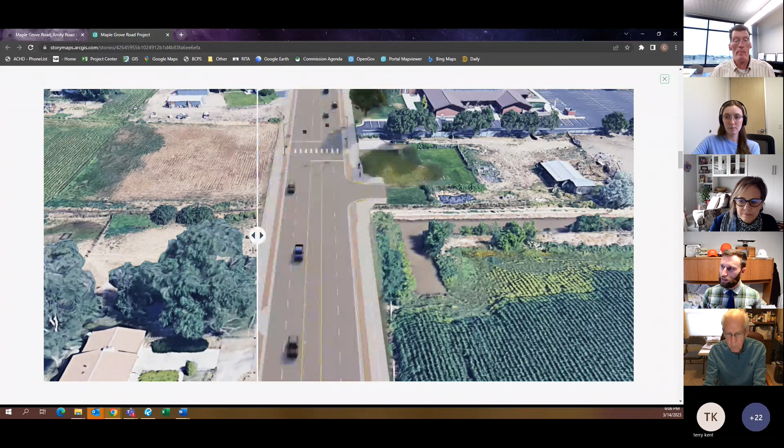The 5-lane road includes 2 lanes in each direction with a center turn lane, and then 10-foot wide multi-use 2-way pathways on both sides of Maple Grove. These have generally a 4-foot buffer, which will likely be stamped concrete that then widens out a little bit at the intersections.

We also plan to add a U-turn at the Victory Road intersection, and then the roundabout at the south end can be used for U-turns also.

One of the changes we'll talk about is this pedestrian hybrid beacon, a type of pedestrian signal. When drivers approach it and it's activated, it'll flash, going from yellow to red like a standard traffic signal. When it's dual red, everyone has to stop and stay stopped, giving time for pedestrians to enter and possibly even cross the entire crosswalk. But what's efficient about these is once enough time is given, the red lights will flash back and forth, so then it's like a stop sign. If the crosswalk is clear, you can keep moving forward.

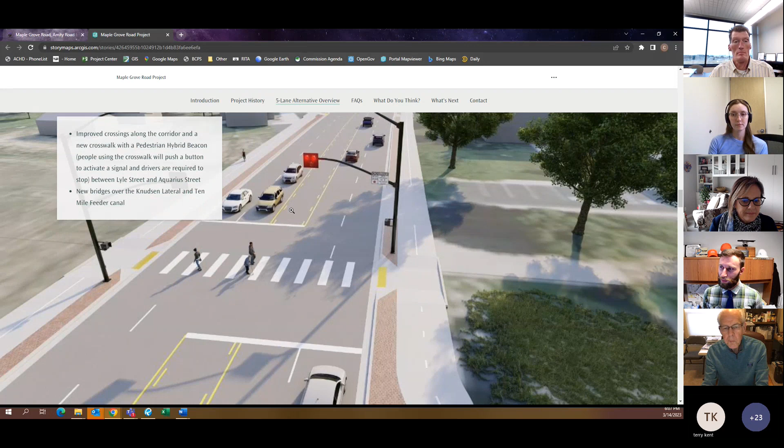This project also includes new bridges at the Knudsen and 10 Mile feeder canals. And this PHB I'm showing is between Lyle and Aquarius Street.

I'll scroll a little bit up here. You can see the PHB. We decided to change from 2 PHBs on this project to just 1 - PHB being pedestrian hybrid beacon. That's because this development near the center of the project plans to have a pathway that connects into the school grounds to the east. So we figured this was the best place for kids trying to get to school to cross, and a more efficient use of the PHB.

And then if we get to the south end of the project, the roundabout at Amity. A roundabout improves pedestrian safety by having shorter crossings, so you're crossing 1 lane at a time and you only have to look one direction. Crossing here, you look left; crossing here, you look right, instead of worrying about traffic in both directions.

We'll also add rectangular rapid flashing beacons, which we call RRFBs. Basically, you walk up, press the button, and you'll have yellow flashers on both sides of each crossing. That makes you more visible both to cars entering and when you're leaving as you cross through the roundabout.

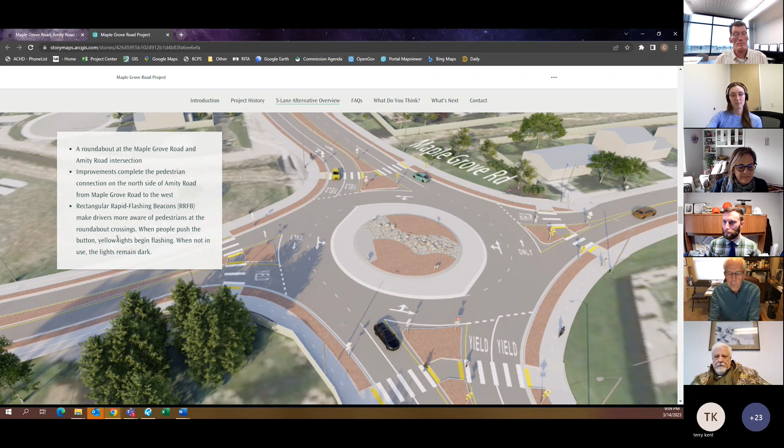For more of a detailed look, we have these 2 exhibits, the widening exhibit and the roundabout exhibit. These just give a view of the whole project area so you can see it all at once.

Some changes since the first public involvement session in March. We did shift the center line of the road about 12.5 feet just on the south half of the project, basically between the 2 churches. That's the maximum, so it tapers out to a point in the Boise City parcel and tapers back in. We basically wanted to utilize that open area that exists and have a little bit less impact on the houses on the west side.

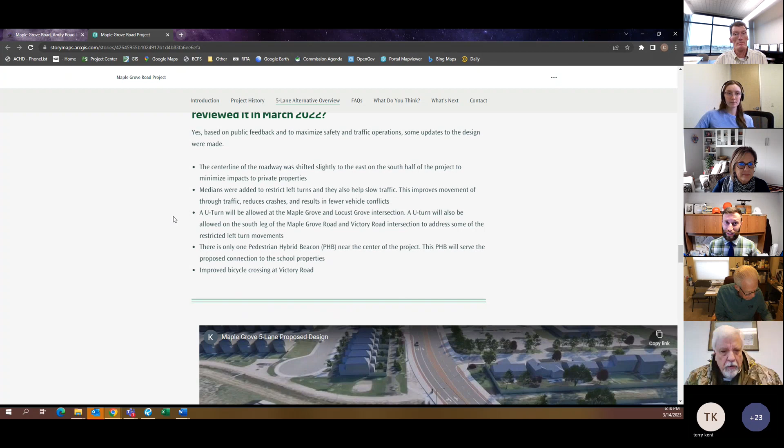We did look at doing more centerline shifts on the north half, but really we believe it's fairest to keep the center line the same as it is now, down the center, on the north half of the project.

We also added some medians to restrict left turns. This helps slow down traffic, calm drivers, makes the road seem a little bit more narrow, and also reduces conflicts - fewer times that a car can hit another car or a car can hit a bike. Again, the U-turn at Victory and then the U-turn through the roundabout make up for these lost left turns.

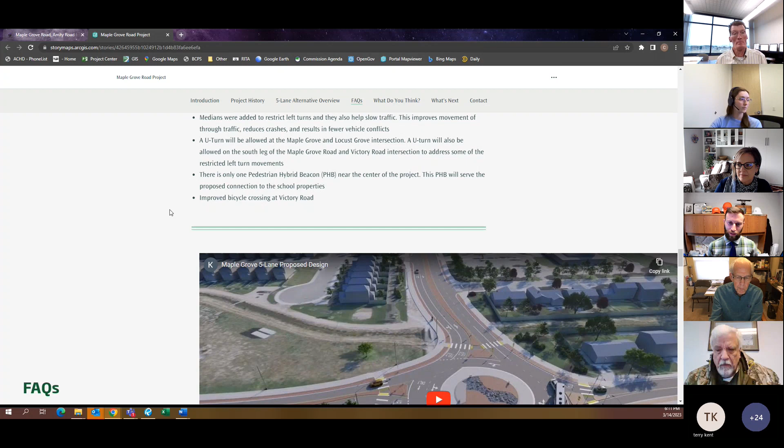I talked about the change in the PHB locations, and we also improved the bicycle crossings at Victory Road. Currently there's a bike lane that carries through the intersection, having to cross the right turn lane and then go through. Instead, we plan to have the bike lane enter a pathway on the northeast corner - you would enter the pathway and then cross in the crosswalk. Same thing on the east side of the intersection. We expect bikes to cross in the crosswalk instead of having to ride through with traffic.

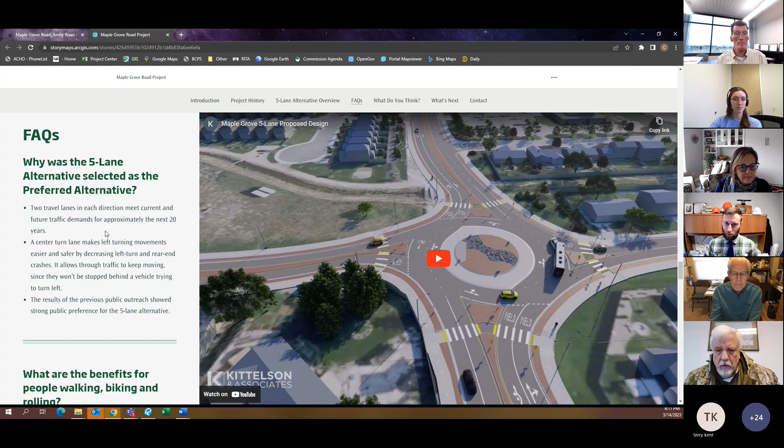Some frequently asked questions. Why was the 5-lane selected? Basically, we need 2 lanes in each direction for traveling vehicles to accommodate traffic demand for the next 20 years.

Then the center turn lane, where we're not adding medians, adds safety for left turners by getting them out of the way of traffic. So if you're turning off of Maple Grove, you're out of the way of traffic. And if you're turning onto Maple Grove, you can do that in two phases, so you don't have to look at traffic going each direction. You can enter the center turn lane and then merge onto traffic after that. This was the preferred alternative from public comment.

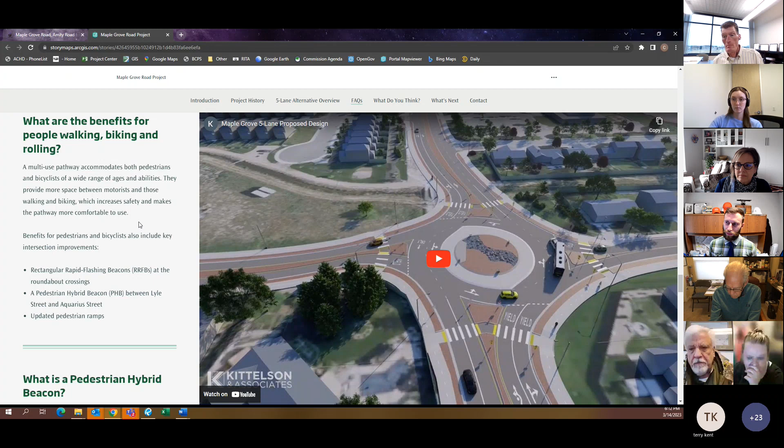Benefits for walking, biking, and rolling. The pathways - we are now striving for what we call the 8 to 80, 8 years old to 80 years old, making people comfortable to walk and bike along roadways. We believe pathways are the best way to accommodate that. If you're a competent cyclist, you're still legally allowed to ride in the roadway, but we feel like the pathways make most people feel safe. Then we talked about the RRFBs at the roundabout and the pedestrian hybrid beacon near the center of the project.

Cody, let's take a pause because we have a question about the operation you were talking about. So the question is, when traveling north on Maple Grove and approaching Victory, there is no left turn option. So traveling north on Maple Grove and approaching Victory Road, can you turn left onto Victory Road? I'm guessing they're talking about Bennett Street.

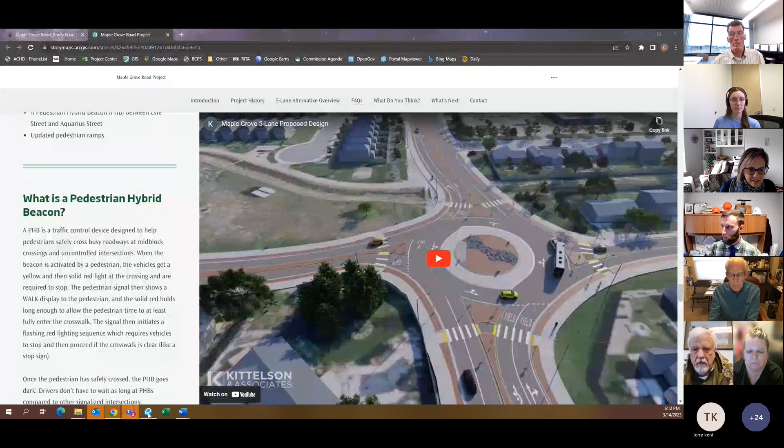At Victory, like I said, we plan to add a second left turn lane, which includes a U-turn. But because of extending these left turn lanes, we feel there'd be way too much conflict at the Bennett Drive intersection. So instead of being able to turn left onto Bennett, you would use the U-turn. And instead of turning left off of Bennett onto Maple Grove - sorry, Burnett, not Bennett - you'd travel east to Mitchell, or the street next to that, and then turn right onto Victory. Then you can come through the Victory intersection and turn left, or keep going east if that was your preferred way. This is basically a major safety improvement.

As you can guess, if we open this up and pull the median back, you wouldn't know if someone was turning left onto Burnett or just merging into these left lanes, which could cause rear end crashes. As well as visibility looking down the hill to Victory Road as vehicles come up the hill and being able to see them as you turn left.

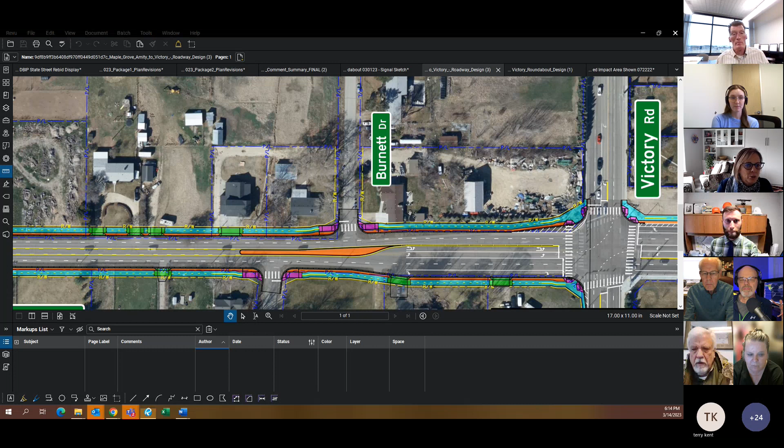Thanks, Cody. I think that graphic helped a little bit with that explanation. Perfect, yeah. So we talked about PHBs.

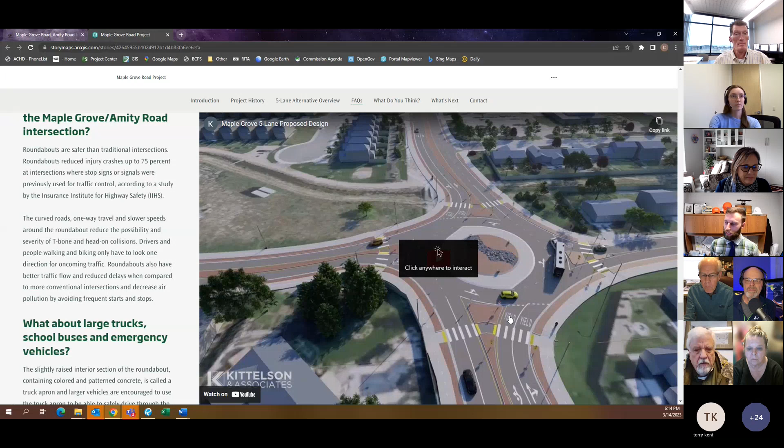Why we chose the roundabout - basically, roundabouts are much more efficient and safer than signalized intersections. As you can see here, they can reduce crashes up to 75%. And when there are crashes, they're usually low severity, since they're usually sideswipe crashes instead of head-ons or T-bones, and usually happen at a much slower speed. At a roundabout, the geometric design forces you to slow down to 30, 25 miles an hour as you enter, whereas at a signal, you can carry through if you hit the green light at the speed limit.

And then for large vehicles, semis, fifth wheels, this gray area here is the truck apron. That allows large vehicles to overtrack and still get around the roundabout, while deterring small vehicles from going too fast through it. Especially for semis, they're trained to take up the center, both lanes, just to make sure no one enters on either side of them. That way they have space to use the truck apron without impeding other traffic. So if you do see a semi doing that, that's on purpose.

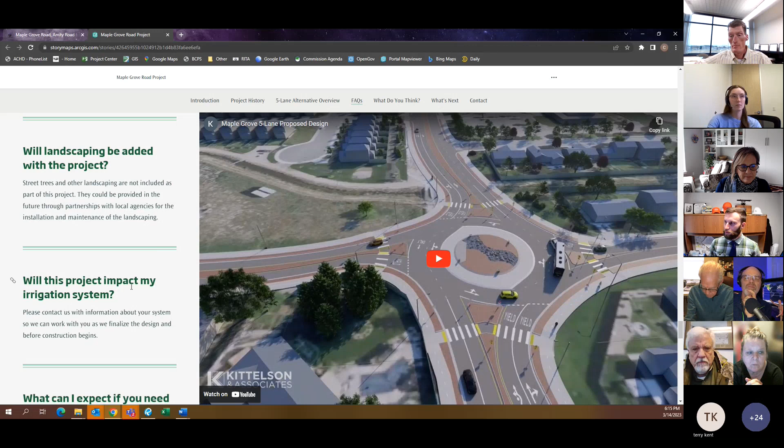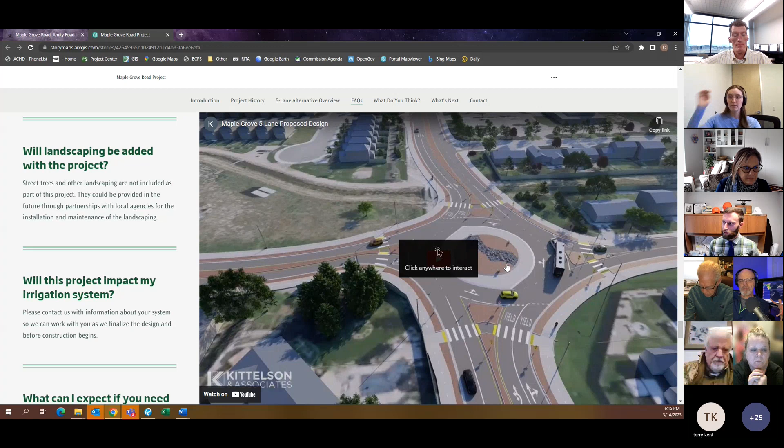Currently, we don't have any landscape plans for the project. We do a kind of hardscape in the center island of the roundabout, and we're still looking at options there. There is a stormwater basin planned here and up the road, and those will be vegetated, so those will be landscaped. But as far as the buffer and the center island, those currently don't plan to be landscaped. In the future, the county, city, or even neighborhoods could request to do some landscaping in the center island.

And the project may impact your irrigation system. Please reach out to us if you think that it might. We've already met with quite a few property owners along the project, and we just like to know for sure how it works and how you use it so that we can try to replicate it.

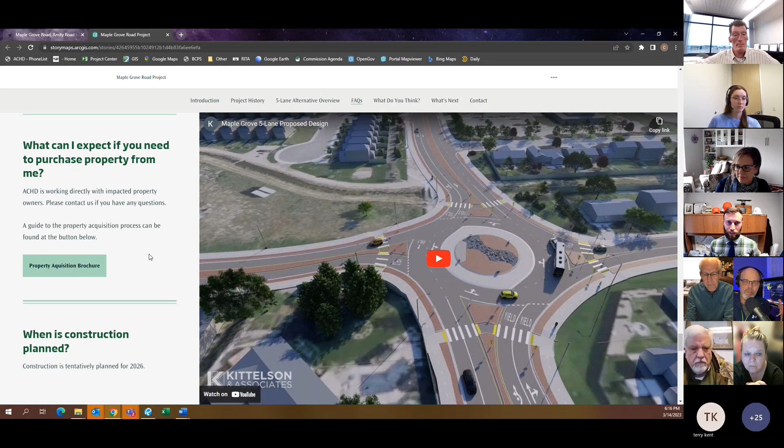And if we need to purchase property from you, there's lots of good information in this acquisition brochure. Again, I would recommend you just reach out to me directly so we can talk one-on-one and get into the details about the property.

And if you looked on our 5-year work plan, which is getting updated this summer, we had the roundabout to be built next year, 2024, and then the widening was just in the future. So our new plan is to build both of those together in 2026.

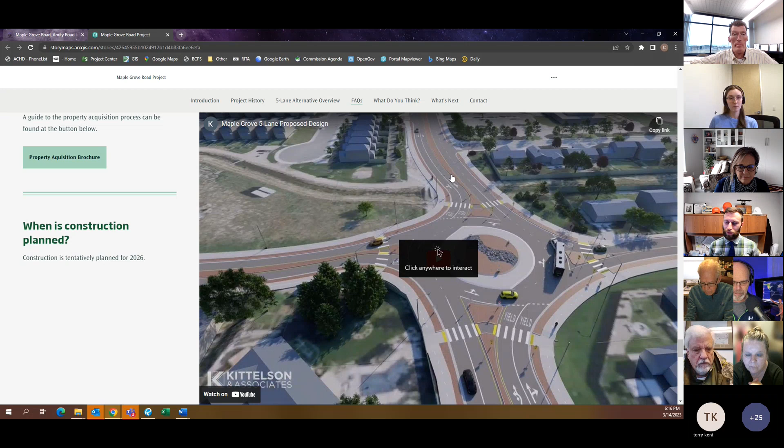And below that is a link to the survey, and below that is a timeline. Again, future, but 2026 is the most likely date there. 2023 is when we want to go through the right-of-way process into 2024. And if you need it, my contact info is at the bottom.

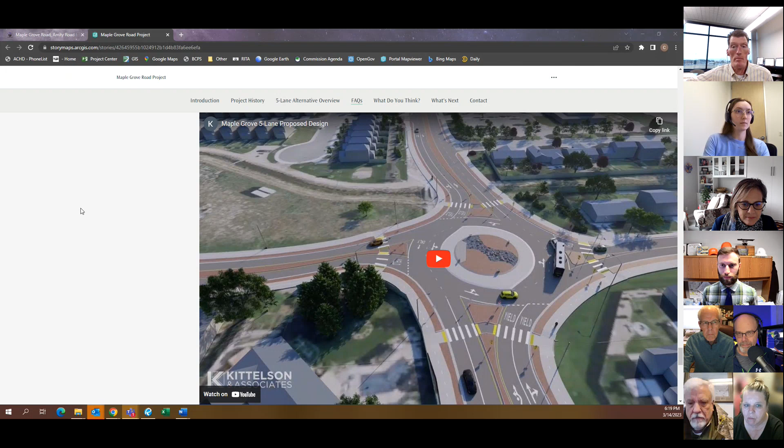So you should be able to go ahead and unmute yourself. Can you hear me now? Yes. Yeah, so I live fairly close to the intersection of Amity and Maple Grove. How far is that divider? Is there a divider that keeps you from turning left or right? And how far does that go from the roundabout, or is there one?

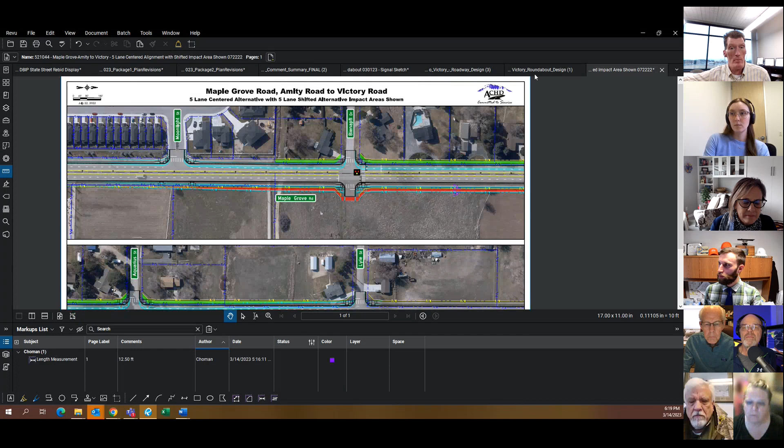So we plan to extend the center median about to Moonlight. So they will be allowed, so it's kind of split between these two. And that's the north side, and the south side, it's pretty short. It doesn't extend to Cree. But with the extension up to Moonlight, this is proposed to allow left turns into Moonlight. So instead of being able to turn left into Tillamook, you would turn up into Moonlight and you come back to Tillamook. And then if you want to go northbound, both would have to turn right and then use the roundabout to make a U-turn.

So Cody, my concern is me coming out of my property, I've got to turn right all the time. I can't go anywhere but head to town. And which street do you turn off of? I'm right next to the church, my driveway's right next to the church. Oh, gotcha, of course, I can't turn left. So I've got to go right all the way down to the roundabout or whatever. So how do I get back to where, if I want to go left to take my kids to Amity?

Okay, yeah, if you wanted to get to Amity, theoretically you'd use this turn here, get on Moonlight, and go back the other way. That's probably not preferred, you'd have to go through a subdivision. Do they know that these subdivisions are going to have traffic in the middle of them? To be honest, we did realize this pretty recently, and I was going to ask if we would look at adding a Michigan left here, so this would be not just a left turn, but also a U-turn.

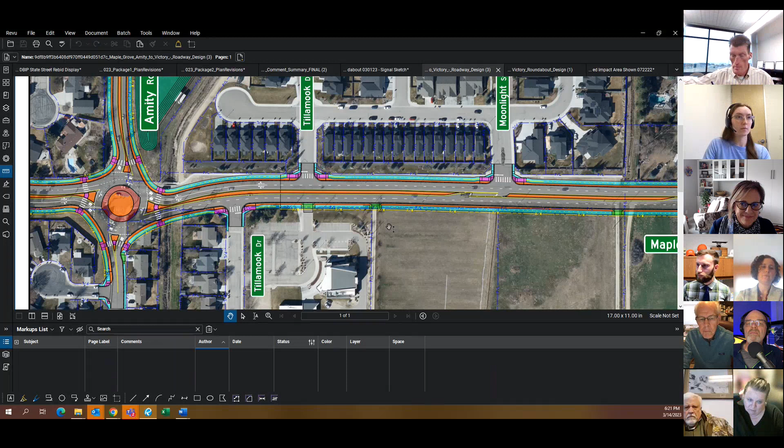Yeah, because we go shopping at Albertsons out on Lake Hazel, I can't get there without going through this subdivision. And I can tell you, because of the pipe being put in the water line right now, that subdivision is, everybody in the world's going through that subdivision. They're up in arms. I can tell you that right now. Yeah. Great. Thank you for sharing that perspective. That's important information for the team to know.

All right, Anthony? Yeah, so you guys said that you shifted the horizontal alignment on the south section, but on the north section, what's the offset from center line to the new right of way, and what was the offset from center line to existing right? Because it's 48 foot right of way right now, so 24. What's the horizontal alignment look like on the north section?

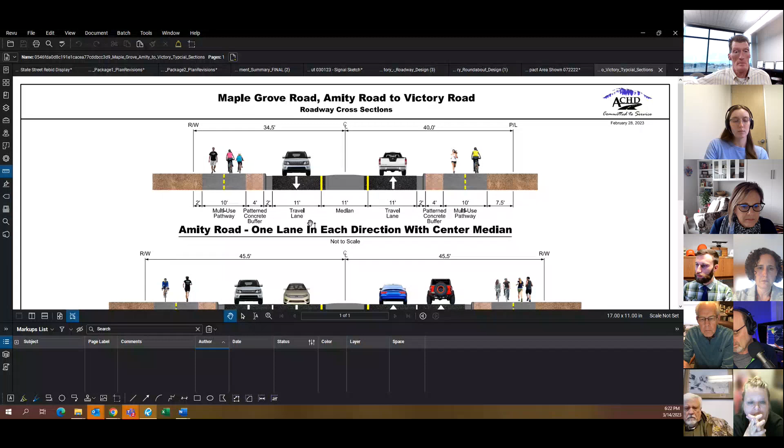So on the project website, we do have the typical sections for each one. So with the 5-lane, where it's, like I said, the north half is pretty much centered on the existing center line. So it's said 45.5 feet. Well, I mean, pretty much.

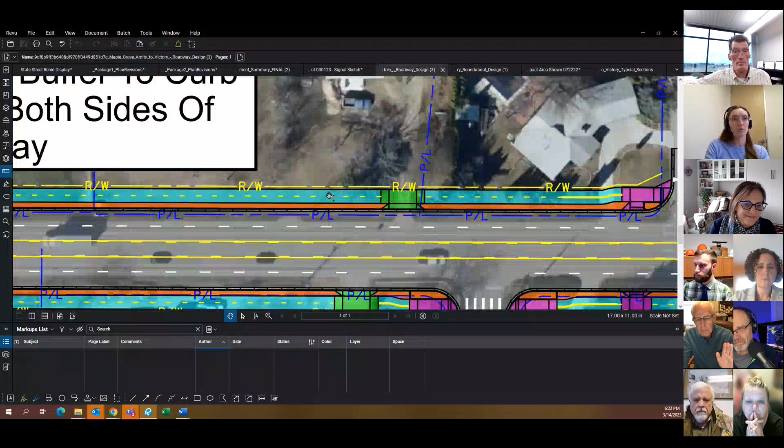Is it exactly on center? I mean, could I go out to my fence and measure an additional, like, whatever, 24 minus 48, 45.5? Can I just go measure that from my fence? Or is there some shift?

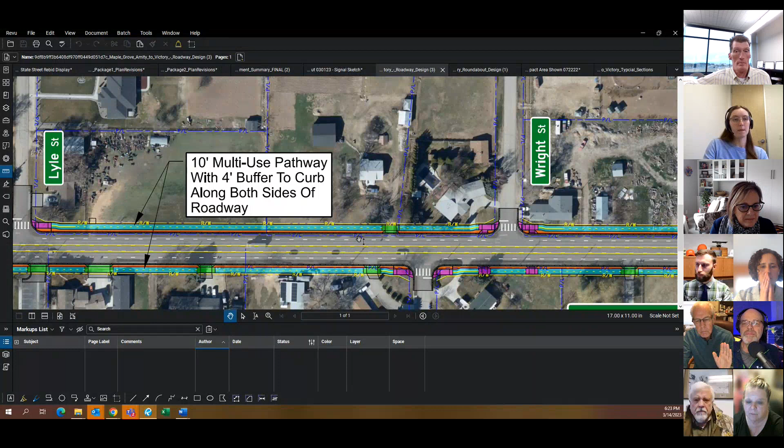Did you, because the street widening from Victory to Overland, you guys jogged that all over the place to try to avoid properties, so if it's on center line, evenly offset between the left and the right, then I should just be able to go and measure it from the current fence line or property corner. So is it constant on the north section, other than at the intersections and down by the south end where you shifted it for the roundabout?

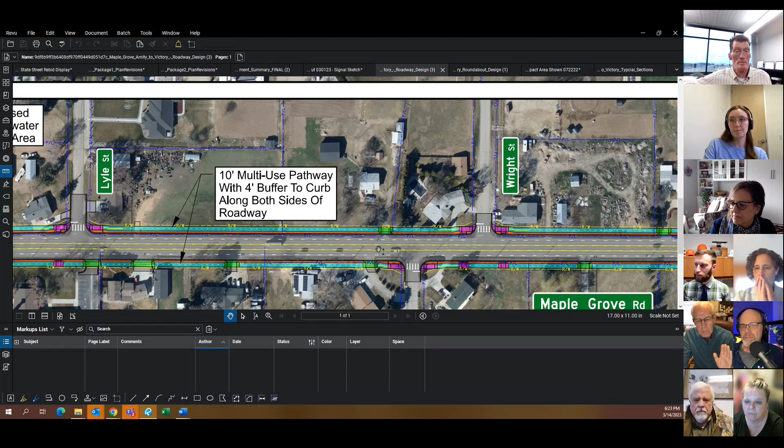I'd say effectively, yes. We need a little bit extra right of way at the side streets to get the extra room for the ped ramps to cross, and to get the offset for the pathway crosswalk. But yeah, as I zoom in here, you can see existing center line is pretty well centered on the center turn lane. Okay.

All right. We'll come back to you, Anthony, if you have some follow-up questions on that, but let's keep moving forward. Jill, you have your hand up?

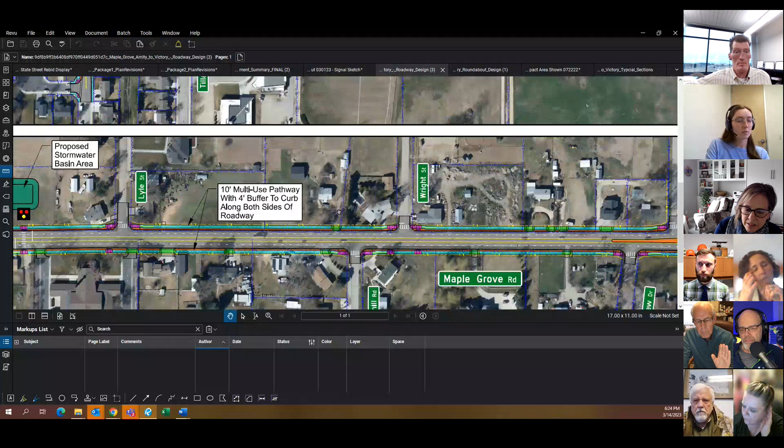Yes, my question is, if this project starts in 2026, when is the Amity to Lake Hazel section scheduled? That's hard to say. It was scheduled for future in the current five-year work plan. We'll know much more in July when the draft five-year work plan gets put out for public comment. But as of now, it doesn't have a construction year.

Okay, that's good to know. And then when you say 2026, is that like start of construction or end of construction? The goal would be to bid the project out in the fall of 2025, so that way we could start as close as possible to January 5th or so in 2026, and then complete the project by that fall is the current goal. Okay, that sounds good. Thank you.

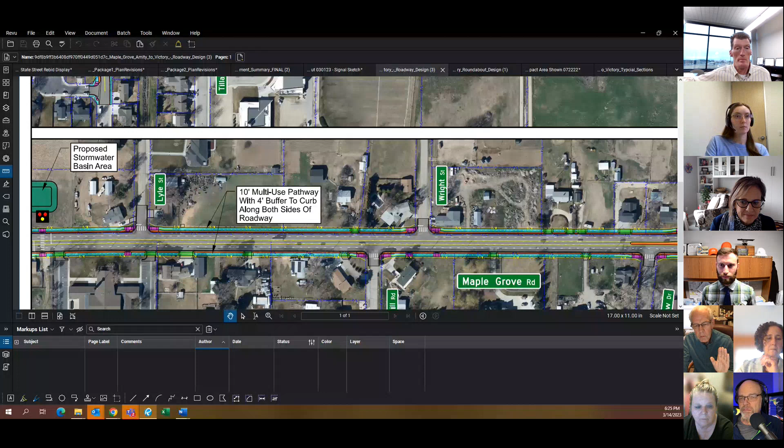Thank you, Jill. Emily? So I'm just curious, like, what made you guys want to start this project? Were there any specific problems that this is looking to solve?

In general, it's to accommodate future projected growth. This project's been on what we call the capital improvements plan. It's a 20-year plan, you can browse through that, it's on our website. And for the most part, Maple Grove, 5 Mile, Eagle, all of our roads are planned to be widened to 5 lanes. That's the main drive for most of these projects is future growth.

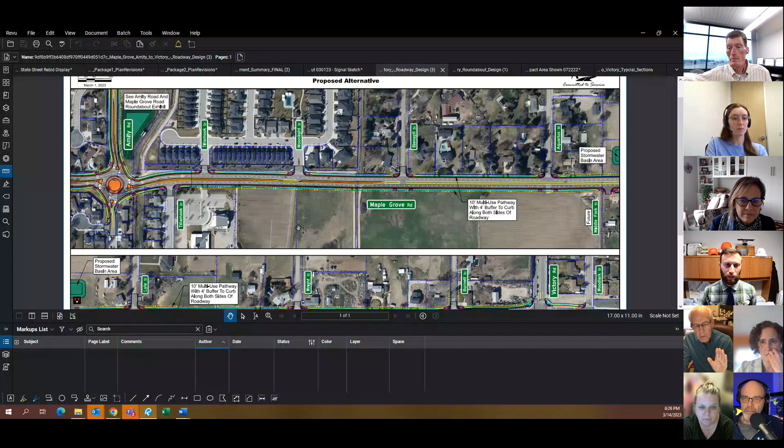Great, thank you. Dawn, do you have your hand up? Yes, can you hear me? We can. Okay, I've made many business trips into Michigan where the Michigan left is used.

And it's an excellent way to do the kind of turn that you have need of here, so you do not have to go through somebody's area. So I think that should be the way to incorporate that. That is, if you have traffic through those people's houses, they're going to be upset.

My other addition to that was that in Michigan, when the traffic got so busy that the Michigan left people had trouble turning, they would actually put up a red light there to halt traffic so that the string of left turners could get through. So that's how you do the growth on that.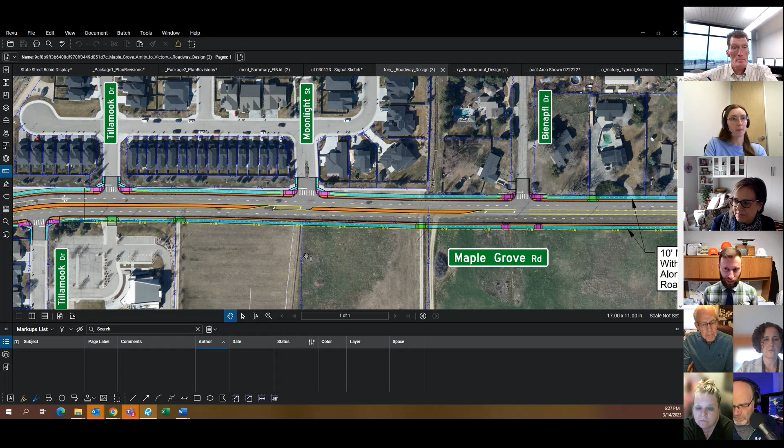Yeah, we've noticed that Idaho Transportation Department recently installed one of those on Eagle Road, just north of Fairview, where they actually closed down a Michigan left because they were crossing so many lanes of traffic.

And then to make that safer, they added a signal there. And as you said that, I realized, instead of at Moonlight, maybe Bienapfl is a better location, or just another place we have room. Yeah, great point.

Thank you. Yeah, and realize that when you get your center lane for collecting the cars for the left, you may need to move that a little bit further north and lining it up right with that Moonlight Street. But anyhow, that's my comments. Thank you.

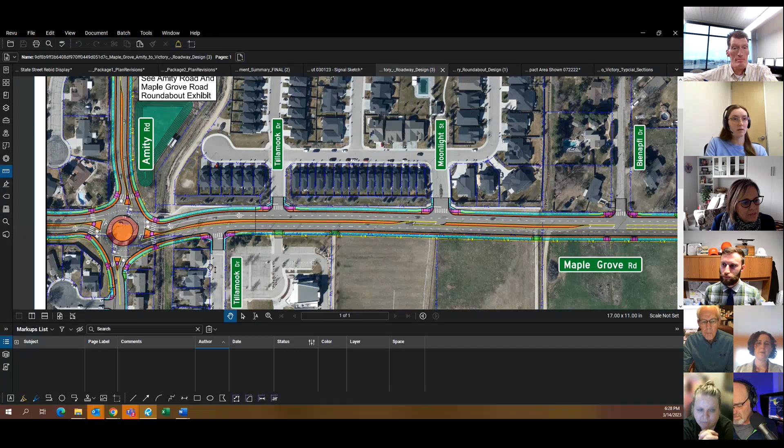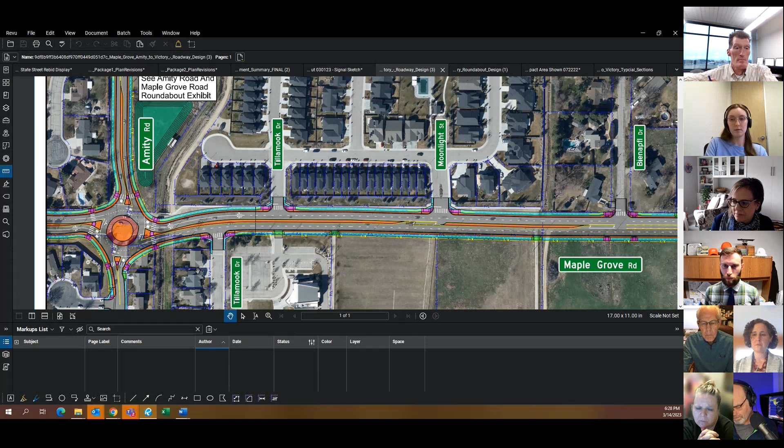We can, thank you. I'm surprised actually that you chose the intersection of Amity and Maple Grove to put in the roundabout, because there is no access from Amity over to Cole Road. So there's only 3 places where people can join that roundabout to get through. I'm wondering why you chose to put it there.

So roundabouts have specific uses, and there's thresholds for where they work best. Just how traffic flows through here with a heavy majority of traffic being on Maple Grove, it allows that traffic to keep moving without needing to completely stop for traffic on Amity. But it also forces people to slow down enough that people on Amity can also use the intersection. And it helps to calm traffic by also slowing people down.

So it's one of those locations where roundabouts can be used really effectively when all 4 legs have lots of traffic, when it's more even, or when you have lots of traffic on one movement. So this lets traffic continue to flow on Maple Grove while still giving access to Amity.

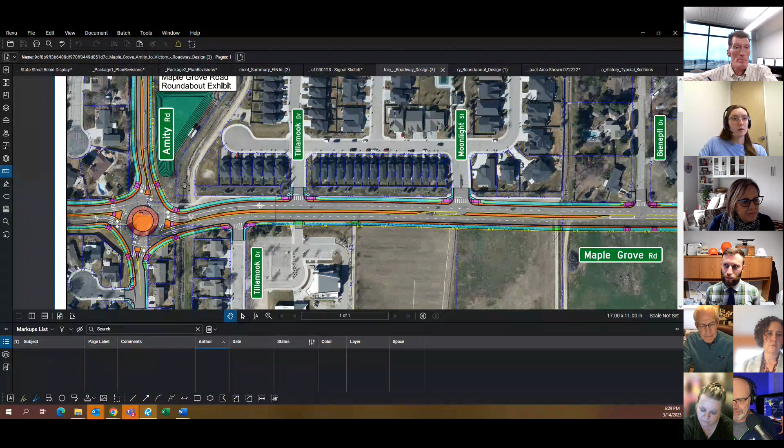A good example where that's the case, roundabouts just like this one, multi-lane, we've installed: there's the one at Eagle Road and Zaldia, which was mid-mile between Amity and Victory. Also the Whitewater Park Boulevard roundabout is another example of a multi-lane roundabout. That's basically a 3-leg intersection with the entrance to the park, and that's why we chose the roundabout, to keep traffic flowing on Whitewater instead of having to stop it every time someone wants to enter or leave the park or the small side street.

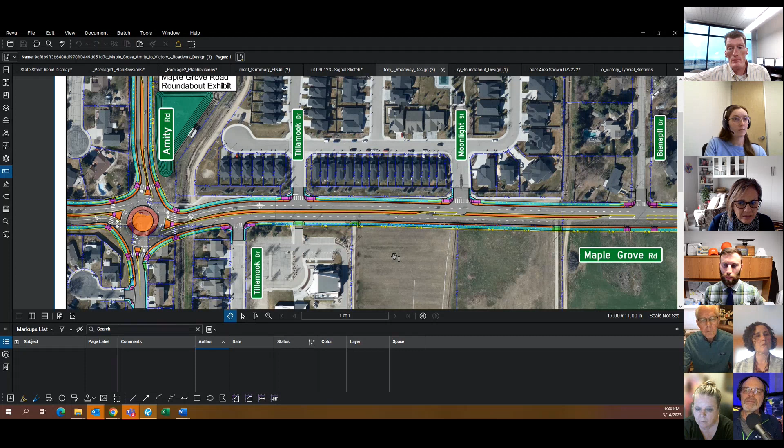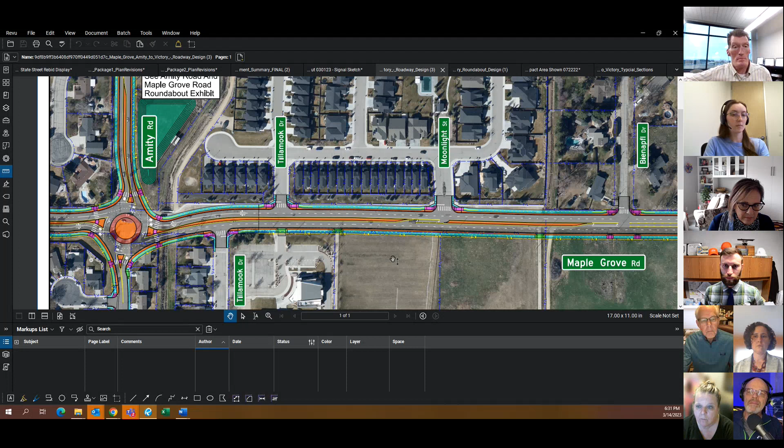Are you talking about restricting left turns or the roundabout, or just everything in general? Restricting left turns and the roundabout, I guess from my perspective, it seems a little excessive. And then my second question would be, I don't know if it was mentioned earlier, but planned improvement between the park and potentially that new subdivision that's going in right now, and if it's not a park and it's a bunch of houses, how that will affect this as well.

Sure. I mean, the road's not widened yet. There's no center turn lane now, so it's hard to kind of track crashes for this location. In general, ACHD is looking more into restricting left turns just because of the safety improvement of fewer possible conflict points.

Within reason, usually no left turns means you have to drive further out of your way. That happens along Eagle Road, where it's a highway where you can't turn left for long portions, and you can make either a Michigan left, turning at the center mile, or at the intersections.

And also these medians slow traffic, and that's been proven to make the road appear narrower, and it helps calm drivers. You get less of a wide open feeling, so it'll reduce the comfortable speed. And again, it's just a reasonable safety improvement, we feel.

We'd rather not wait for crashes to happen and fix them, and try to make the project as safe as possible. Same with the roundabout: not only is it more effective with moving traffic, but also the safety improvements there have been pretty well proven.

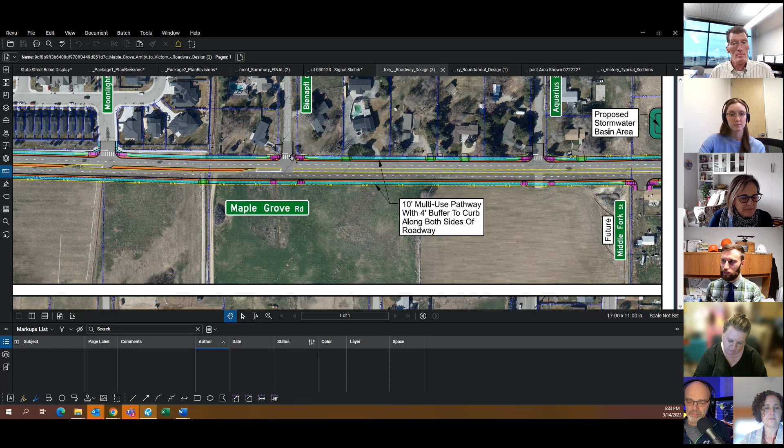So to go to that first, when this area develops, we've kind of left that open. Another reason we moved the pedestrian hybrid beacon from Bienapfl is we're not sure if this development will take access off Aquarius or off of Bienapfl. Most likely Bienapfl, and then we would likely have a traffic signal there, depending on what the development actually is.

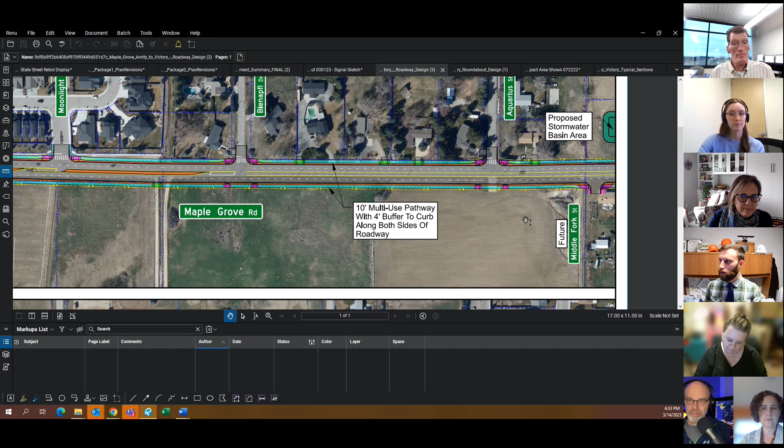And then, sorry, it's been a long day, I have to remember the other part. Will you remind me what you just said about the final point? The white markers—oh, thank you.

For the bike, yeah, we don't plan on that. So that is part of the point of the pathways, is that there would be no bike lane—so no bike lane, no markers. Bikes, if they're comfortable, can ride in the roadway, but most cyclists would use the pathway instead.

Great, thanks. And before we go back to Anthony and some of the other people with their hands up, just a quick explanation, Cody—there was a question about the two bridges. What are those exactly? We know they're over the canals, but could you explain where those are and what they look like?

Yeah, so the first one's the 10-mile feeder, just north of Amity. You can see we have to widen the bridge and shift it to the east. That'll include full pathways on both sides. We'll extend it out so it's clear of traffic, and just improve that—right now there's basically just the pedestrian facility on the west side, nothing on the east side.

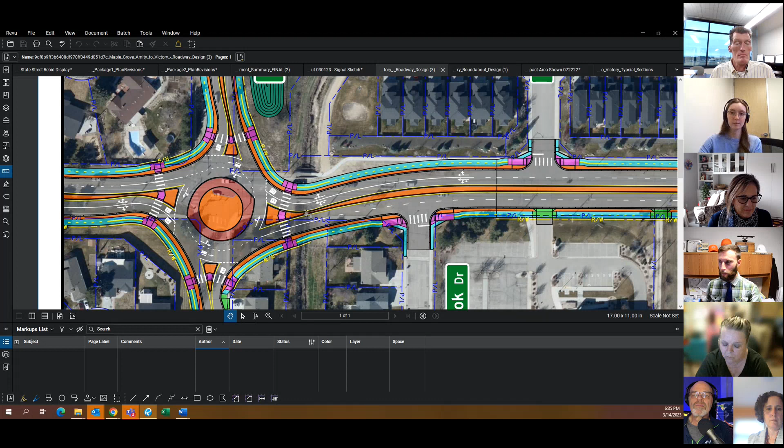And then up here is the Knudsen lateral, and this is a pretty basic improvement. We'll extend the existing bridge, replace it, and extend it again so it's away from traffic and away from the pathway.

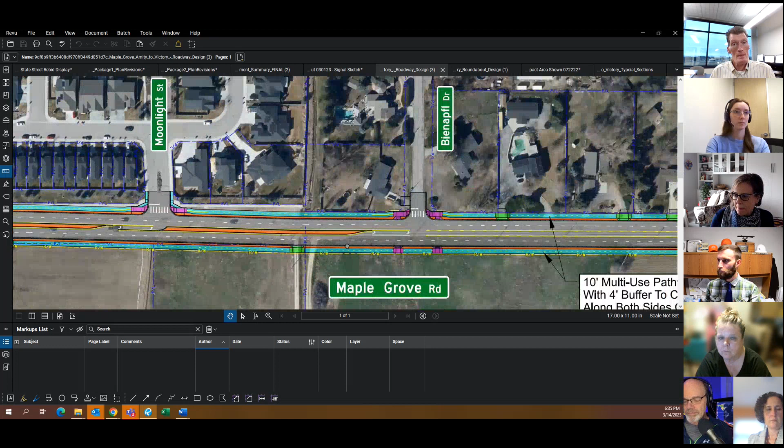Great, thank you. Anthony? Yeah, so I noticed in looking at the colored proposed hatching of improvements that there are a lot of people on this alignment, including myself, that have horseshoe driveways. You've eliminated the driveways for most of them, so now there's only one entrance and exit out of a single driveway. But then there's some, like north of Wright Street, there's a home with a horseshoe driveway where you've kept both driveways, it appears.

I don't know what the rhyme or reason is for why some people maintain two driveways and others get—yeah, that one right there above your cursor—so why some people are getting two driveways to maintain existing access while others are having some of their access removed. I had sent Cody an email and asked, and it's, I guess, to reduce the number of people or points of people turning into the road, but access to our property is pretty important. So why are some people getting or continuing to get two, and others having half of their access eliminated?

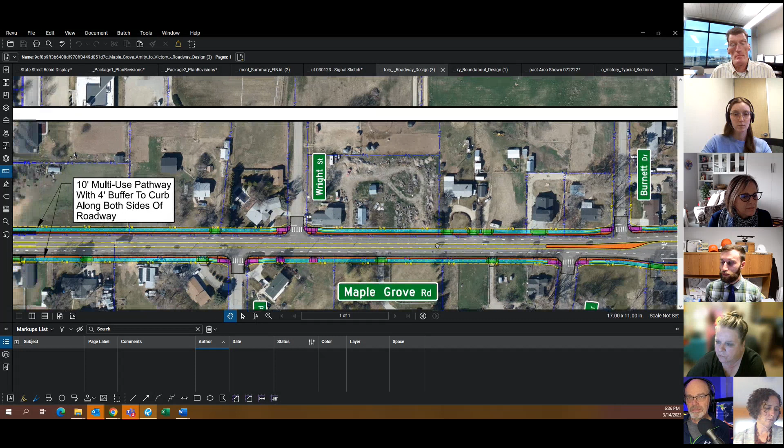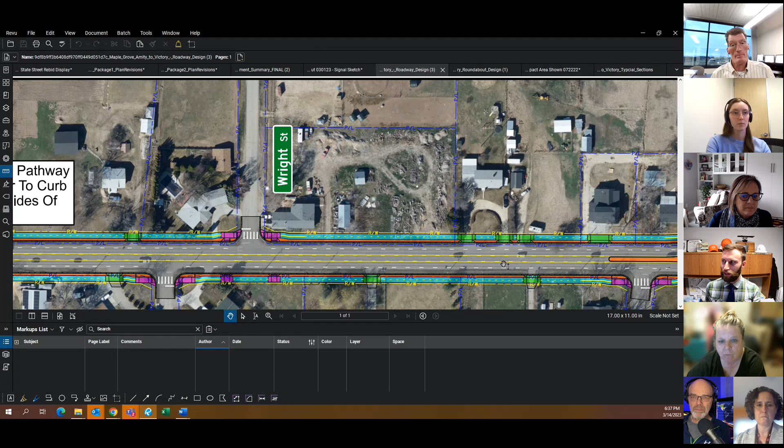Right, to clarify, or just to add on, a goal of this project was to reduce accesses where feasible, and each property is context-sensitive. So the one remaining here, this is an active daycare, and there really wasn't a way to allow cars to enter and back up. Parents come in and use this as a looping entrance and exit. So to safely get kids out of there and not have traffic back up onto Maple Grove, we considered having those two accesses there, and if things change in the future, we can remove those accesses.

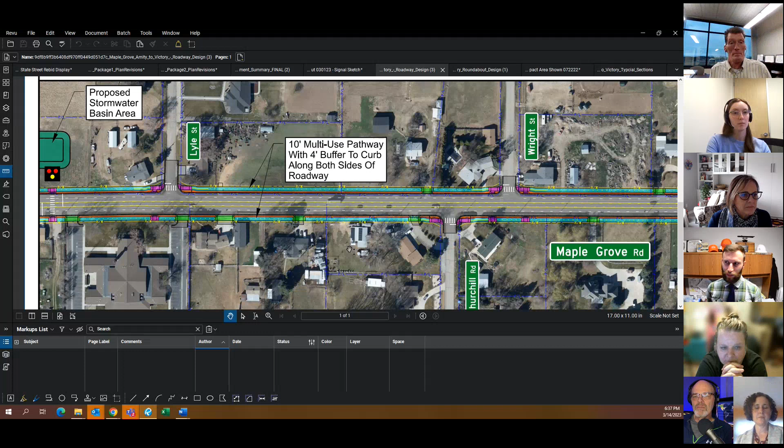Another example, over here on Churchill, to continue using this part of the property, this homeowner needs to be able to enter here and back in or pull through, whereas this property owner just has driveway access here, so we might realign this to make it easier. But all these are just proposals—they can be discussed during right of way. Overall, I wanted to show what ACHD would prefer take place. It doesn't mean it has to, but we do try, especially on these arterial roadways, to limit access as much as feasible.

And again, I do encourage everyone, if you are a property owner along here, to reach out to Cody and discuss your specific questions and circumstances. Leslie.

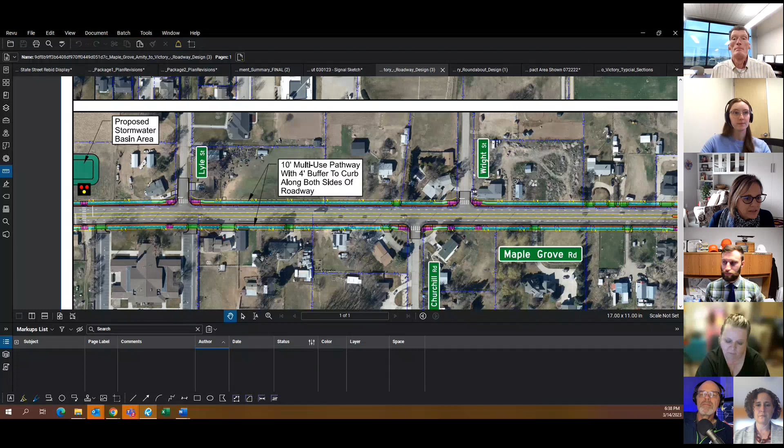Hi, just a couple of things. I get the whole safety issue on not allowing so many left turns. At the same time, I question that we've expanded this road to 5 lanes so we can accommodate more people, and yet it seems like the people along there are having their accommodations taken away by not being able to turn left. So the safety part is one thing, but I think we're smart enough to make left turns. That's why we take driver's license tests.

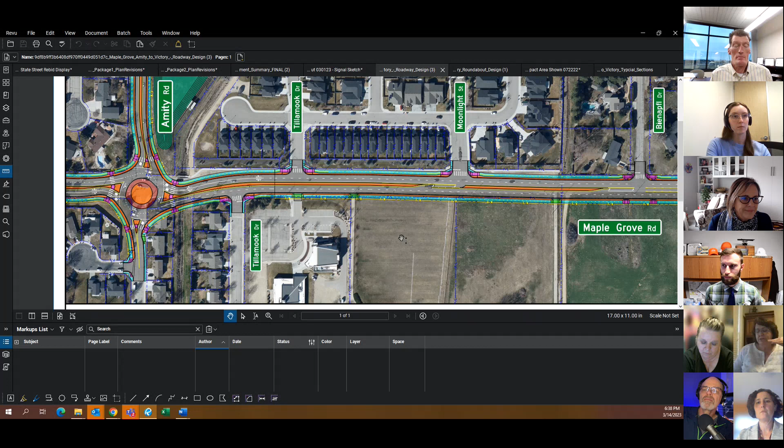I don't think we should have to control that safety. There will be accidents probably no matter which way, and I just feel like there's too many rules and regulations for us to be able to drive like we've been taught to drive. Taking Burnett doesn't affect me, but taking Burnett out to the west and then onto Victory, you're taking them onto a 2-lane road that's already, just with this diversion with the Maple Grove project now, that backup on Mitchell is huge. And to get that traffic onto Victory there, and then to take more people out onto Victory onto a 2-lane road is going to be a huge backup over there.

So we're expanding Maple Grove to 5 lanes. Let's let people use it. Let's let them turn left. Let's let them get on that road. That's why we're doing this.

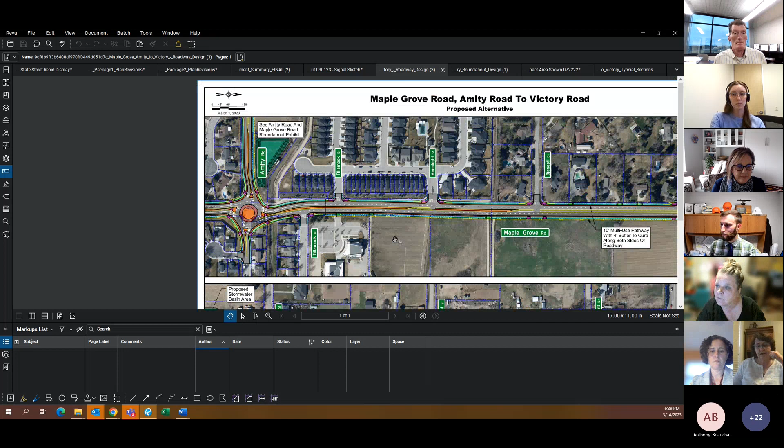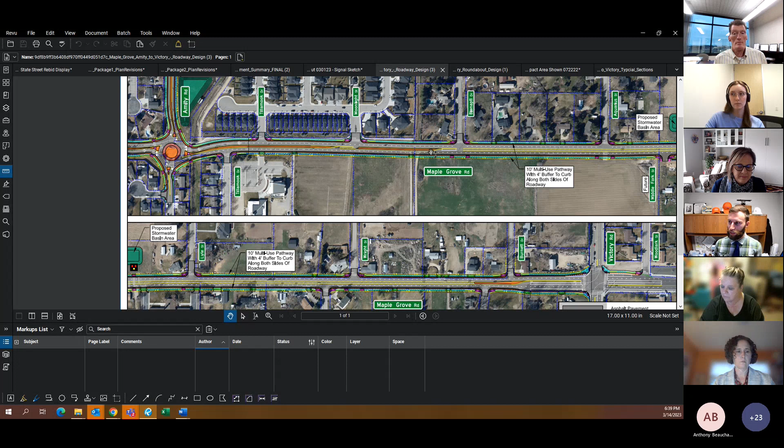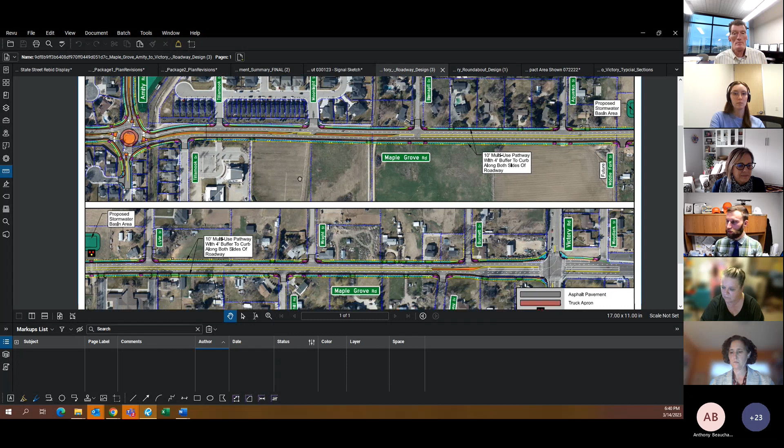Sure, I appreciate those points. Another improvement though with the medians is slowing traffic, trying to keep those speeds down. We honestly did look at adding medians the entire project, which was part of the 4-lane alternative, and realized that that's too far and too much for this project at this point, but it's something that we did think about. Basically we dialed back to these medians on the south end being the feasible ones. Again, not saying that they go through, but more feasible, and we've already gotten some really good comments on those. But this one at Burnett, it's just so close to such a major intersection.

And we anticipate these left turn bays to back up and be full during peak hours. There's going to be a lot of traffic here. So we understand the negatives. And with the detour expanding on those now, hopefully in normal cases, the only people on Burnett are the people who live along there. And there is another side street off Mitchell that you can turn on. I forget the name because I'm not very good at pronouncing it. Let me see if I can pull that up real quick.

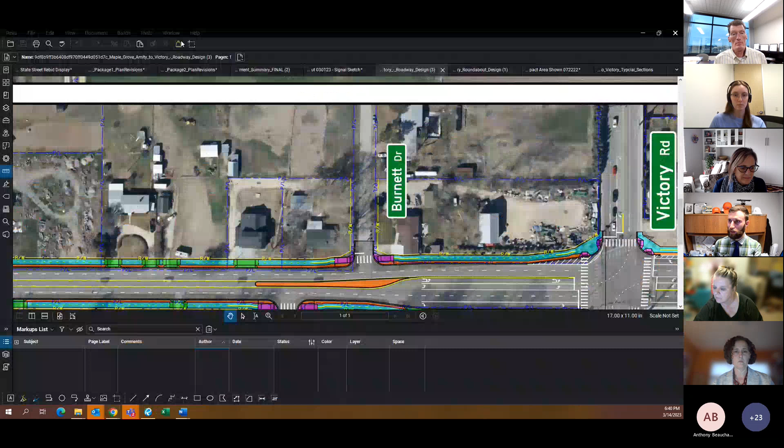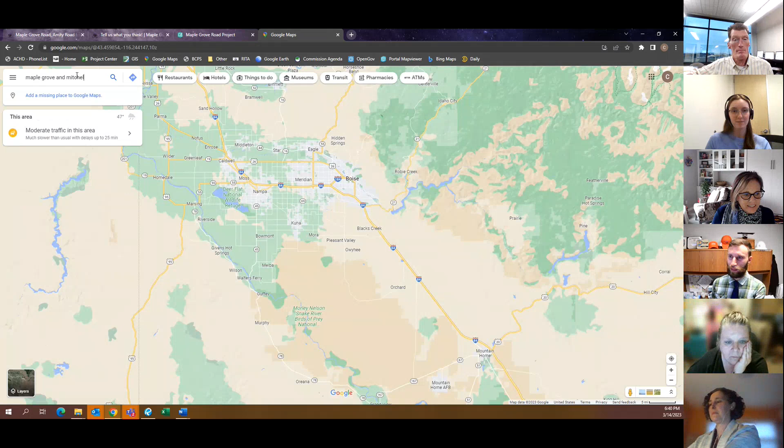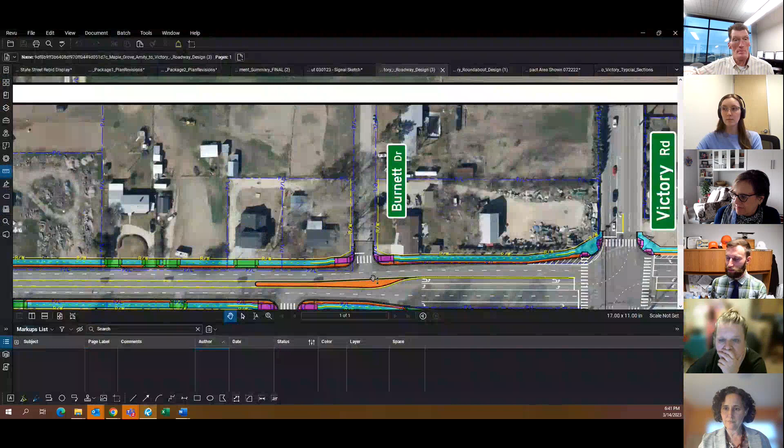It's Quercus you're looking for, I think, Cody. Yeah, that sounds right, thank you. And like I said, it's not - probably misspelling Mitchell. Here we go. Yeah, Quercus Avenue. Again, we realized this one is less - well, it's still about safety and reducing conflict, but this one is even more of just a design requirement of having an intersection so close to a major intersection.

All right, Alan. Yeah, I have a question, questions. Just as a result of the last conversation about traffic as a result of the project, I'm not sure I understand that. Maybe you could explain that again. How will this current line cause traffic that would otherwise not be going down Burnett?

Sorry, Alan, sorry, I'm not done. Yeah, you're breaking up. Your sound is breaking up. So I think your question is still related to the restricted turns and the amount of traffic. Can you hear me now? Yes, can you hear me? Yeah, so I did not understand how the traffic would be increased as a result of the project design. Could you explain that again? Was the question about the purpose of the project with traffic growth?

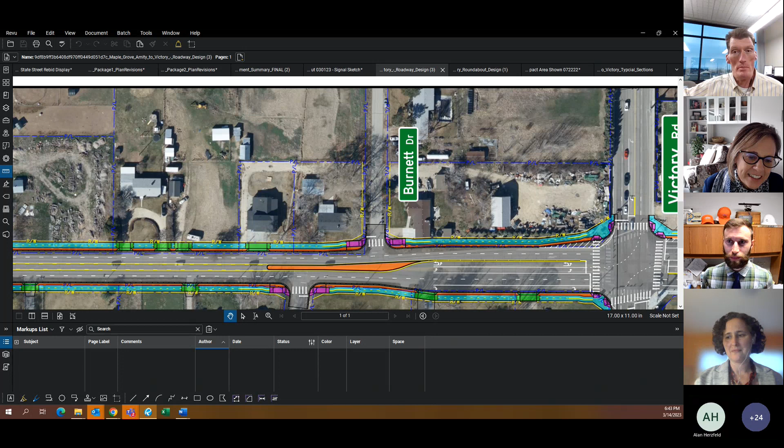Alan, you're still breaking up, can you type it in the chat real quick and we'll follow up? How do I do that? At the top of your screen there's a bubble that says chat, and if you just click on that you should be able to type your question in. You keep breaking up at that critical word, we can't hear you. I'm sorry, I do not see the chat on the top of the screen. Dang it. I don't see a chat option. If he's on a browser, it may be at the bottom, it's a little like a conversation bubble. Maybe, is it on the bottom of your screen?

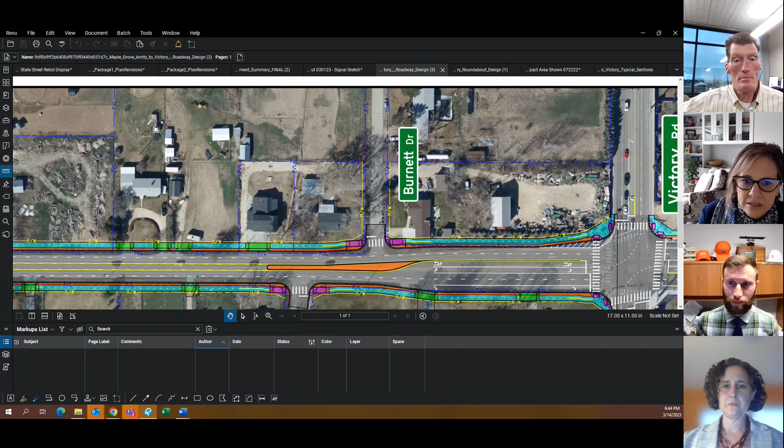I don't see it. I'm sorry. All right, try your question one more time. Be brief. You don't understand.

I don't understand why there's going to be an increase in traffic on Burnett as a result of the project design. Got it - we don't expect there to be.

Basically, people who live on the east end near Maple Grove would use it more often to get to their homes, so it'd be less than a dozen more cars a day, likely when we're not in this detour. Right now there's utility work adding a water line down the middle of the project, from the Knutson lateral up to that new development. So there's a lot of detour traffic coming through Mitchell, and some people turn onto Burnett once they see the closure. But overall, it shouldn't increase traffic on Burnett.

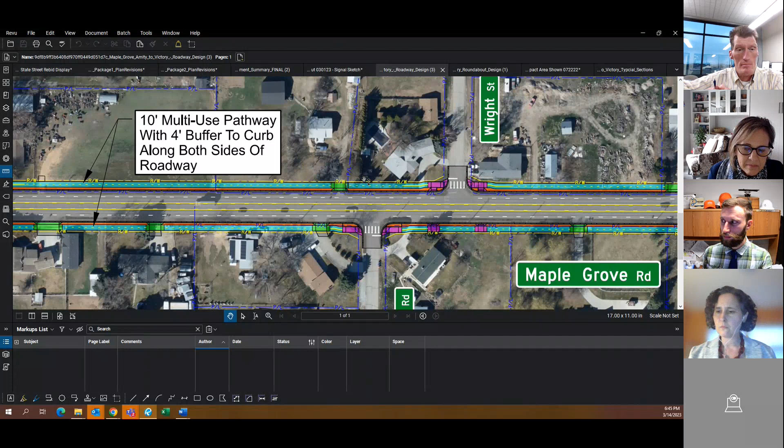The other question I had was whether there's an irrigation pipe that goes under the grove now, basically where Churchill is. It goes from the east side there, just south of Churchill, across Maple Grove, and then enters a large steel weir that feeds water to Wright Street rotation and to Burnett Street rotation. It's very close to the east side of Maple Grove right now. I'm wondering if you're going to be excavating and replacing the current irrigation pipe under Maple Grove, and whether the weir will be affected by the project.

In general, it's likely we are, and we will work with the ditch rider or the irrigation district to make sure that what we replace matches or is better.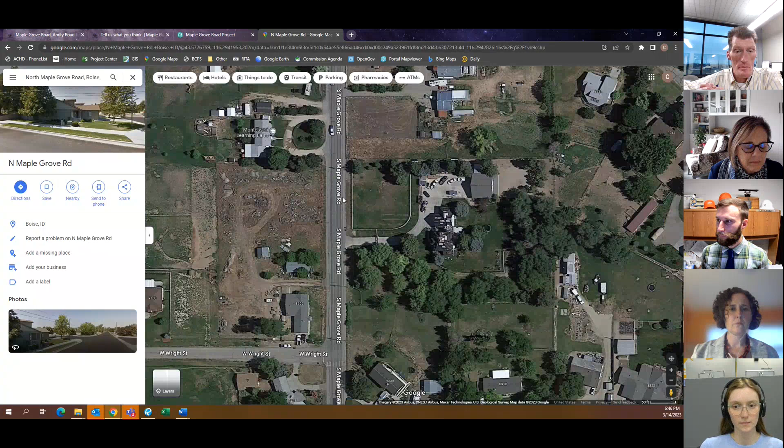I actually have your old plans - I can show you where that weir is and where the line goes from the 96 sewer line improvements. It should be in our survey, but in general, anything that we impact, we will replace in kind.

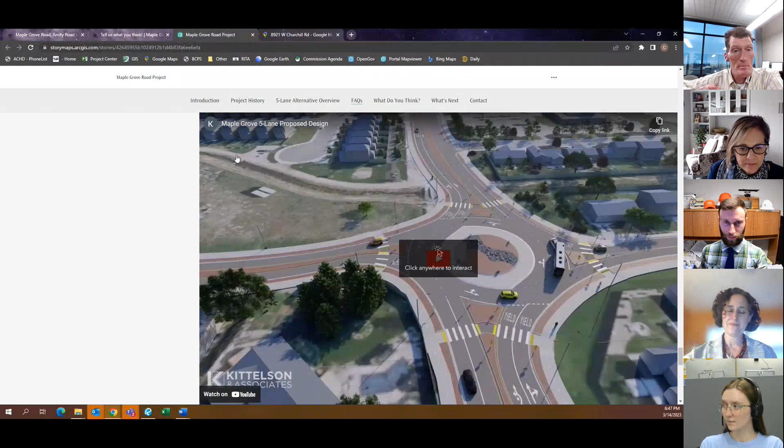Terry - yes, I forgot one question I had. My concern is with the roundabout, being so close to it, we can't turn left, and there's no stop signs anymore, no stop lights to stop traffic. So with people coming down Amity and down Maple Grove in the future, when you extend five lanes all the way, I will not be able to get out of my driveway at certain times, especially during work time in the morning.

It starts about 6:30 and doesn't get over until about 8:30. The only reason we can even turn right is we have to turn when the light stops traffic before people come off Amity or down Maple Grove. So what are you going to do when I get stuck in my driveway for two and a half hours and can't get out because there's constant traffic coming both off Amity and off Maple Grove, headed north?

Please correct me if I misspeak, but in general the widening itself will help with that - we'll have double the capacity. No, it won't, because people drive in both lanes, I can tell you that. Right, but you'll have half the traffic in one side - well, not half, but it'll be split, giving more gaps in the inside lane. So when this happens with the roundabout, I don't agree with you.

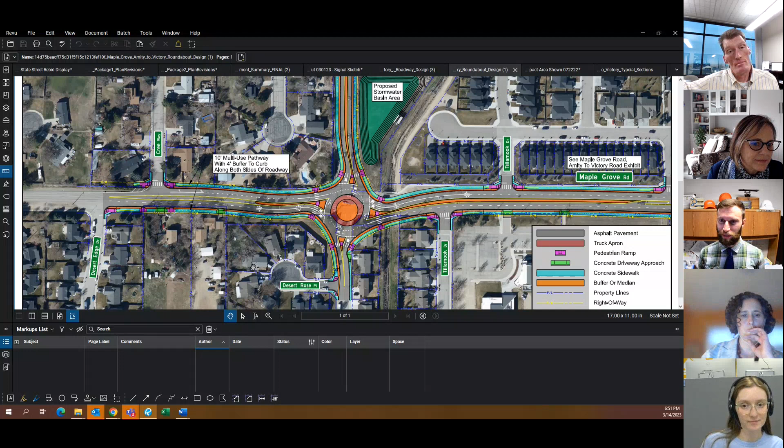Okay. We are taping this. Oh yeah, we are too.

Maybe Cody, you can circle back with some more details and additional information so they feel a bit more comfortable with how a roundabout works, and how you actually get more gaps than the platooning with the signals because of the slower traffic. So maybe some additional explanation, maybe add something to the webpage about how that'll work. So this spring, when I cut hay, my first load, you can come out, Cody, and watch what happens.

Are you able to time that away from the peak hours, the peak AM and afternoon hours? That could help a lot.

All right, okay, so let's go ahead and get Anthony back through, and then we can circle back around for follow-up comments.

So I tried to drop - you guys have the sewer installation plans from '96. Yeah, July '96, it was a 4-month project, and it's what put sewer from Victory south on Maple Grove. I don't know where the termination point is, but the plans from roughly Wright Street to south of my property show a 10-inch sewer main, and there's a stub out on Churchill.

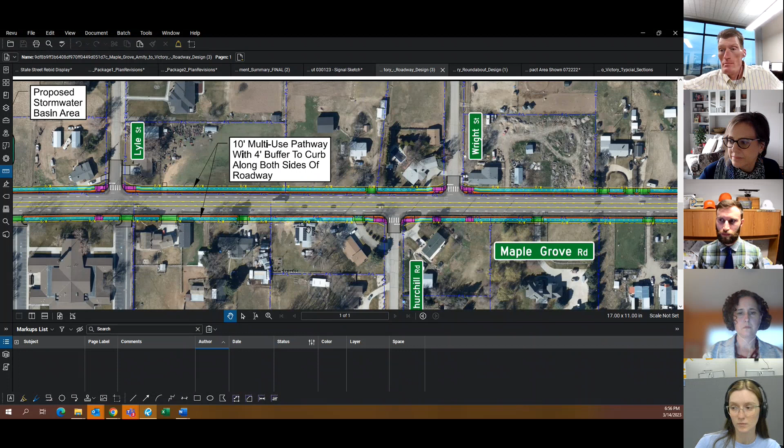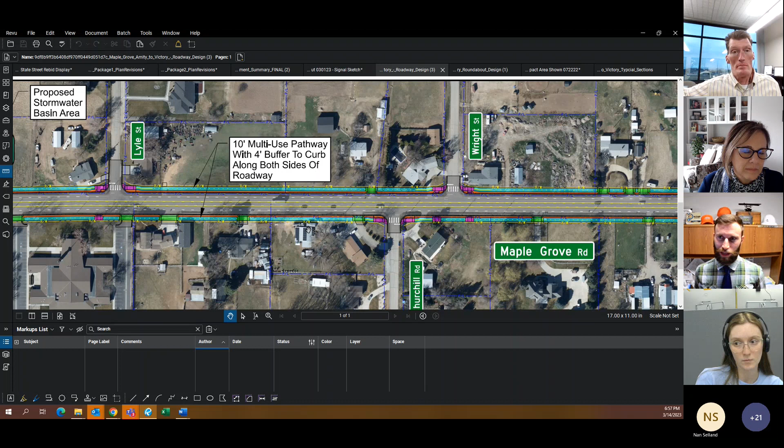Since this hasn't been an issue in the past, I'm guessing it's something routinely done. I can't confirm this, this is just my guess because I haven't had any problems with it on past projects - it's on the utility company to move the connection to the new property line. That would be on the city, not the property owner, because the connection/meter should be at the new property line, and the property owner should not be responsible for anything under the public right of way. But I can't confirm that.

Yeah, but I think that would be a great one to confirm and follow up. Jill also said she's affected by that, so we'll get a more concrete answer and some clarification on that.

As part of that clarification, if you guys have some type of legislature reference that explicitly transfers the ownership of that connection to the public utility - I've been searching in Idaho's civil code, all the government regulations, and I cannot find any explicit reference or statement that says it is. I just can't find it written out in a code somewhere that says when this type of expansion happens, that is then transferred. Government has plenty of laws, it must be written down somewhere. I simply have not been able to find it.

And I work for the transportation department, I have access to right-of-way people, and they can't find it either. So it's an unsolvable enigma, and I'd really appreciate if you guys can solve that, because the last thing I want is in my 80s to be told that I need to fix a main out in the middle of the street.

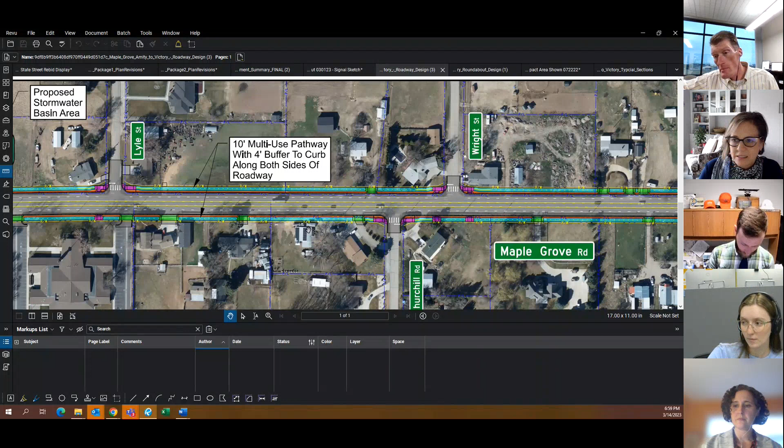Hi, thank you. I understand there's no plan to put city water under the road here during this time, and I wondered why. That would be Veolia, their private company, who does most of the water in city of Boise. They are currently extending the water line that is down on Amity up to the new development just south of the Latter-day Saints Church.

So that might mean that Veolia changes their mind and says they do now want to extend that water line to the north. But again, that's all on the water company - we don't have any power in where they install or don't install water lines. I would say more likely that they would do it now, because someone else extended it a bit for them. So we can ask them about that as well.

That's great. Would it be helpful - I would really like to see city water, mainly because of the fire, whatever danger.

I can't build a bigger house or add onto my house because they can't put out the fire without having city water. So it makes sense to put it in while they've got things torn up.

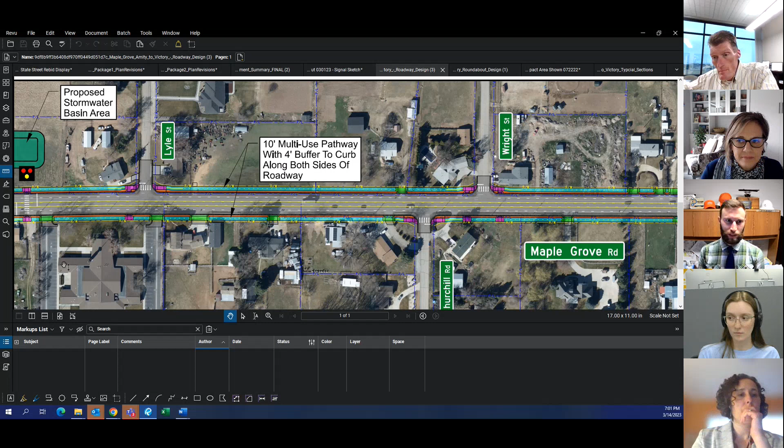Can I talk to Veolia? I don't know how to pronounce that. Is there a way for us to advocate for what we want? I don't have a direct contact, but I'd say go to Veolia Water, Google it, see their contact info, and give them a call or an email saying you'd like to have a water line to this property. Definitely can't hurt.

All right, thank you. Thanks, Jill. And then we also have a question from Alan. Will traffic traveling west on Victory Road be able to turn left south onto Maple Grove?

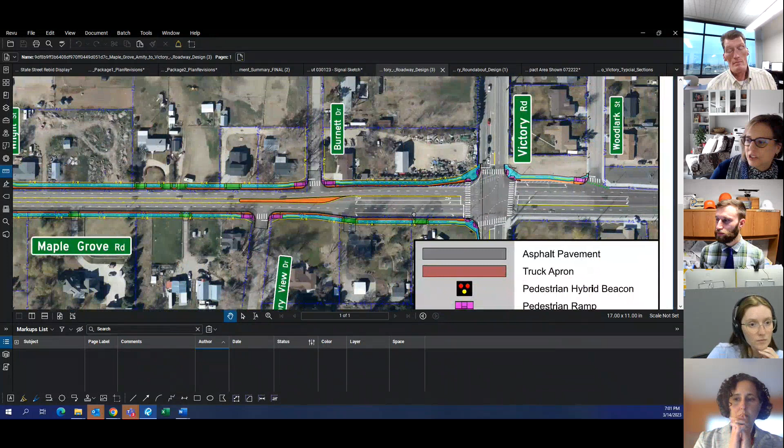Yeah, kind of hidden here. We'll still have the left turn lane on both legs of Victory. Future projects would actually widen Victory a bit. Again, those aren't currently scheduled, but they're in the out years to plan to widen and finish Victory, so that's 5 lanes all the way from Eagle to Cole. There's a few pockets where it's still 3 lanes, and that would include probably adding another left turn on both sides of Victory. All the turning movements at Victory and Maple Grove are still available.

Thank you. All right, Anthony, you have one final question? Yeah, a question and a comment.

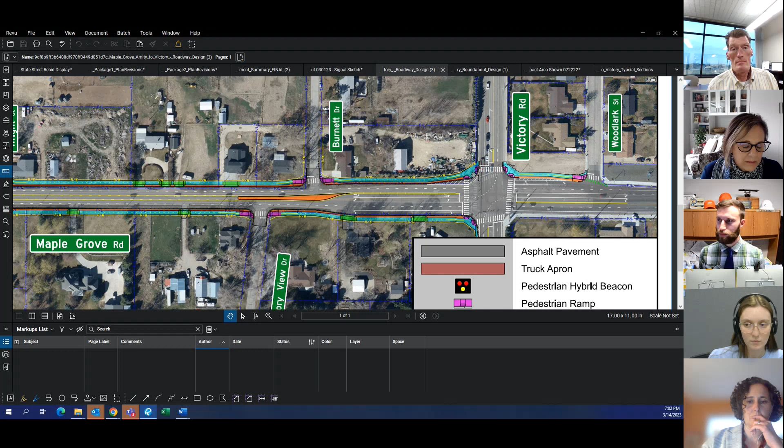So with all this new construction, where I moved here from, there's typically a moratorium on trenching and cutting into the new road. And this ties into Jill's question about water. If the road project goes forward but Veolia decides not to bring the water line further down, and the road gets built, is there a 5-year or decade moratorium on open cutting the new road? Yes, for almost all new pavement, we have a 5-year moratorium.

But by moratorium, it doesn't mean you can't cut into it. It just means there's more impact. So instead of doing a standard trench, they'd probably have to widen or repave maybe the whole half of the road to make it more consistent. It's not that you can't do it, it's that there's a lot more requirements to keep the longevity of the road. So it's possible, but that's the reason the utilities want to do stuff with us instead of after us.

And then I just have a comment about adding the water. I would caution wanting to add the water, because once you do, they will make you connect to it. I know when I connected into the sewer, replacing my septic was not an option because the sewer connection was there. And that impact fee was almost $11,000 to connect to the sewer, in addition to $3,200 in excavation work.